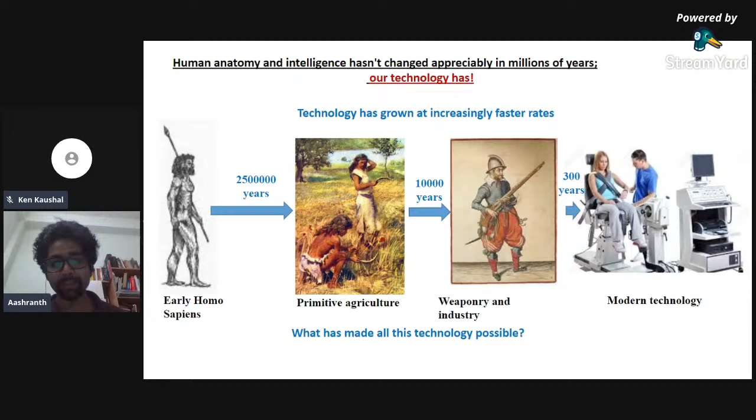The answer, as some of you may have guessed, is to do with materials. Because it's not like our anatomy or our intelligence has really grown greatly in this period. Essentially, the early Homo sapiens had the same amount of intelligence - if you could measure his IQ, it would be the same as ours. So what has changed has really been the way we experienced materials around us and the way we started using them. In the initial Stone Age, we used stone tools. Then as we started using metal tools, we got some ability to handle and shape metals, and agriculture became possible in a mass setting. Then when we found copper and bronze and could start using them, we could extend this a little more. But still, at this point, we were scattered in different bands or tribes in different parts of the world.

It was really the mass production of iron and steel which allowed us to make large groups of human civilization, which have now become countries and so on. So it was because there was so much iron that you could organize an industry, you could build an industry. Most importantly, you could transport material.

So for a long time, it was the case that if oil is found in a certain geography, that's where oil is used. If ice is in a certain place, that's where ice is used. And if minerals are in a certain place, the minerals are only used there, even if they are mined.

So it was to a large extent the discovery and the ways to produce and mass produce iron that led to industrialization. Of course, that led to colonialization. So the countries which developed this technology first went out and started conquering other countries alongside weaponry and industry.

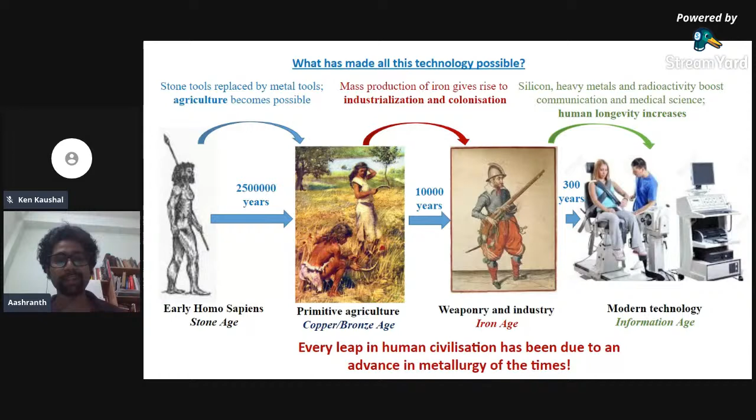Right. So the question is, why should we use metals as tools in the first place? Right. Stone is much more easily found, much more easy to just pick up. It's easy to sharpen. Today you get metallic knives and things very readily in the market.

But if you look at the technology that goes behind it, you need a proper industry. It's not something that generally you can just make at home. You need a smithy, you need a foundry, you need a forge. It takes a lot of things.

And if you see, copper is actually, which you remember the Copper Age and the Bronze Age, copper is actually softer than a lot of stones. And yet, copper tools worked a lot better.

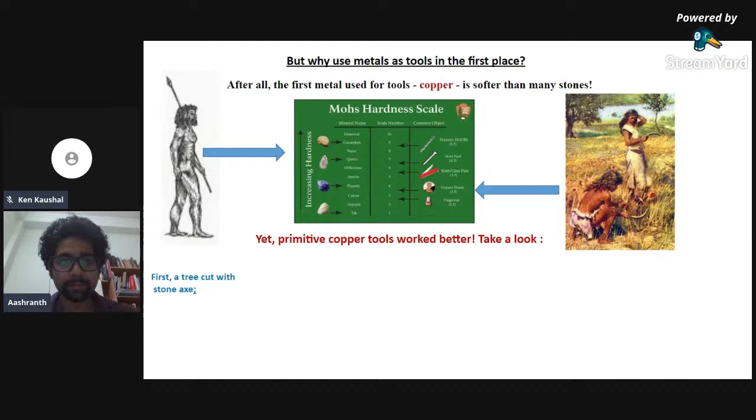You go next, please. Yeah, so this video will probably not play here, but essentially what is being done over here is this person creates a stone axe, and a copper axe, and tries to cut the same thing with them, right? And it cuts much faster with the copper axe than with the stone axe, even though the stone is harder.

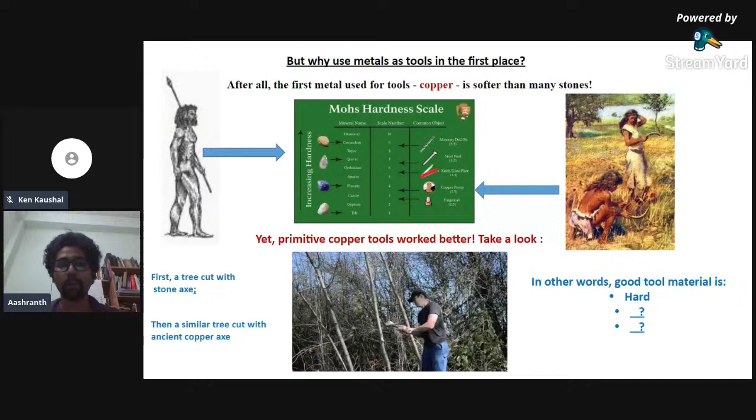So when we think of tools, and essentially an axe is a tool, so what kind of material are we really looking at for a tool? So we know already it has to be hard, because that is what is going to cut through. But there are obviously some other things which is making copper a better tool than stone. So could we go ahead, please?

Yes. So this is a key slide, and I like to think that it has something to do with how we deal with life also, right? So like I said, stones are harder than copper, so they are this thing. But there is something called toughness, okay? So there is something called strength, there is something called resilience. So strength just means how much load you can take. Okay, these three are in normal language, they're used interchangeably.

But toughness is different from resilience, and that is different from strength. So the stone down there is strong because you cannot deform it very easily. The stress ball is resilient because you deform it and then leave it, and it comes back to its original shape. So it is not taking any damage.

Toughness is the cartoon of a boxer being punched down and then coming back. It's the ability to sustain damage, to take damage and be able to move on. And that, just like life, is the key factor for using materials in all our applications.

So it's not that they're the strongest things around. We have stronger materials than metals. It's not even that they don't take any damage, because they do, but they can take damage and still continue working. If you look at it philosophically, that's how you got to be in life. You cannot be the strongest person around. There will always be situations which will overcome you. But what you need to work on is being able to bear that, being able to come back from that.

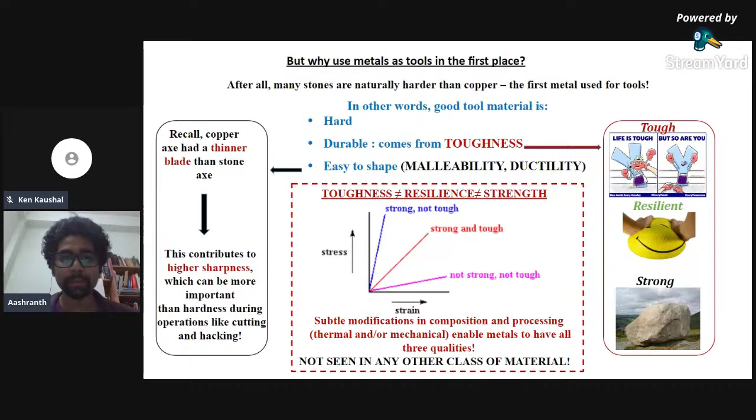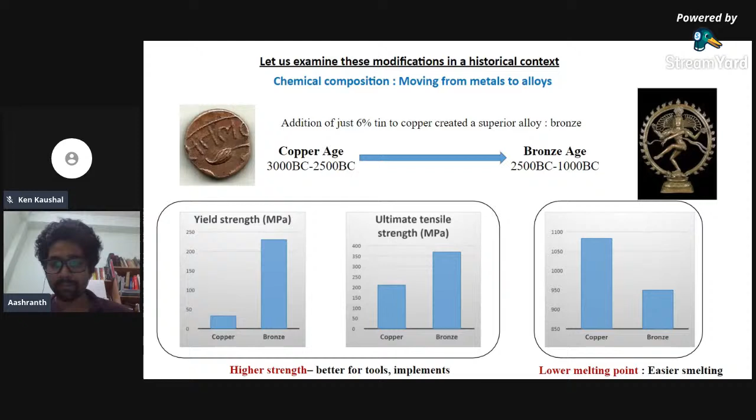Okay, could we go to the next thing, please? All right, so this I will probably go through in a very short time, but I hope it will interest you anyhow. So this has to do with the previous thing.

So when we move from a metal to an alloy, an alloy is essentially a combination of two or more metals. As soon as we mix two of them, in most cases, it creates some kind of defects within the material, and these defects are what make the material strong. This is a very subtle point which is difficult, and I find this in practice because I work on multidisciplinary teams with physicists, mechanical engineers, chemical engineers, who often find it a little hard to grasp that it is defects which give material its unique properties. So a particular kind of defect called a dislocation, that's what makes materials the way they are.

That also makes them easy to deform, and it's by playing with the dislocations that we also make them strong. So in a philosophical sense, it's like the weaknesses or the defects in you that can also be your greatest strength, right? Because perfection is very limited. When something is perfect, there's not much you can do to it. When there are imperfections, you can engineer them, you can tailor them to give you the properties that you like.

And the same thing, this mixing of two metals is exactly why the smelting or melting becomes easier for bronze compared to copper. At this point, we'll just leave it at the fact that dislocations are what help you to deform materials. As soon as you add a new kind of element, a new kind of atom into your material, that atom interacts with dislocations in a different way, in a more aggressive way, and that prevents them from moving. So that's why you get a higher strength.

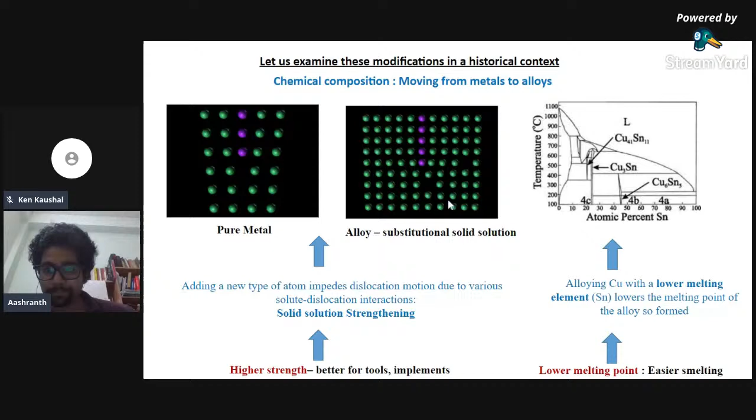Okay, so now we come to iron and carbon, and if you speak to your friends in metallurgy, they will tell you that is all they hear about in 3 years of metallurgy, probably 80% of what they hear, right? And when you think of it, steel is all around us, iron is all around us, and still we keep studying it. This example will probably help you understand why there is so much diversity, so much versatility.

Okay, so just like earlier we spoke about copper and bronze, you added tin to copper to make bronze, and that gave it all those special properties. It lowered the melting point, it made it harder, stronger. A similar thing happens with carbon in steel, carbon in iron. So when you add carbon to iron in certain amounts, it forms steel.

And just so you know, steel is not a single material. There are millions of steels today. Even stainless steel is not a single material, there are millions of stainless steels now. So steel is a broad class of materials which has predominantly iron and carbon. And nowadays we add a lot more things to it.

So it's rigid, it does not bend. Then you have your orthodontic wires, your braces. Those are the same kind of needles.

They bend and they retain their shape, right? So that's how you can use them to wear braces, because they mold themselves according to the shape of your jawline. And thirdly, you have a safety pin.

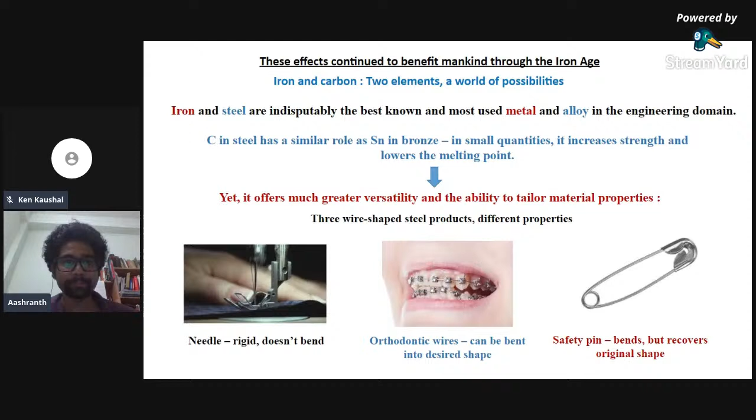Right. So this is a little bit of background into why this happens, and I will not get into it looking at the composition of our audience here. But I will just leave you with this one thought: it's an anomaly, which you could think of as a defect in this system, and that is why iron and steel have this particular property which no other element has.

This particular anomaly, I will just leave you with the fact that it deals with the magnetic structure of the material, the way materials become magnetic above certain temperatures, and below that they have a different kind of magnetism. So it's a very unique thing. There are probably only two elements in the entire periodic table which have this, and no other element has this, and this is what gives it all its unique factors.

Otherwise, you may wonder, why did iron become the most widely used material? It's not that iron is the most commonly found material. Now, sure, we preferentially mine iron and we extract iron.

So, incidentally, any mining engineers in the audience, please leave it in the chat if you are. Right. So we now preferentially make iron, but the reason for favoring it was because it has this inherent versatility. You can make so many different things with it, which is not possible with any other element.

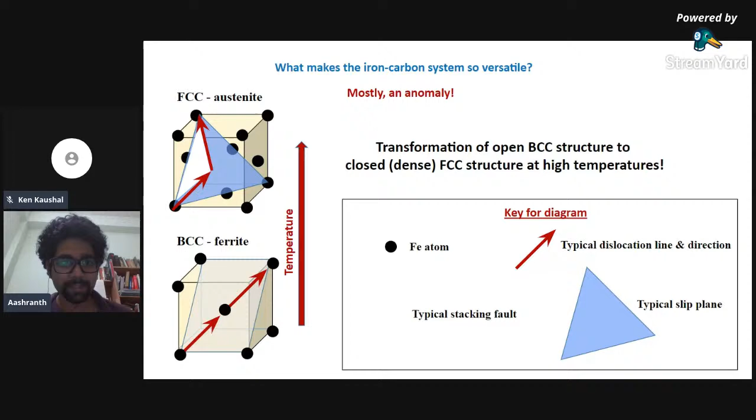We'll just leave it at: there is an anomaly which causes this behavior. But this is the science, or the reason behind it, which we now know quite well, and we exploit it to engineer things. But the fact is that if you look at a lot of historical inventions, the technology has come first and the science has come later.

Iron and steel melt at very, very high temperatures, well above 1,300, 1,200, 1,400 degrees. That is the range in which iron melts and steels melt. So we've somehow figured out ways to do it. And this was the tribe which was producing iron tools, iron implements.

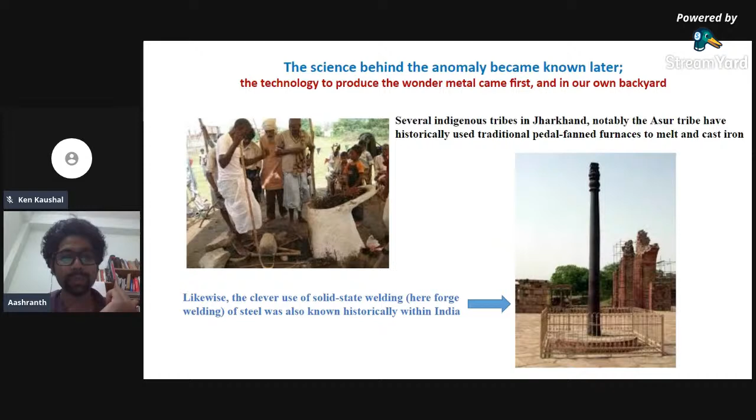So we have had the technology and unique ways to use it from time immemorial. And it's only much later that the science has come into play. The lesson from this is that sometimes while working with these things, you figure out that some particular solution works, and then you go back and find why it works. It doesn't always work the way it does in the textbooks, where you know the theory and reasoning first and then implement it. Sometimes the reverse process also happens.

Okay, yeah, the next slide, please.

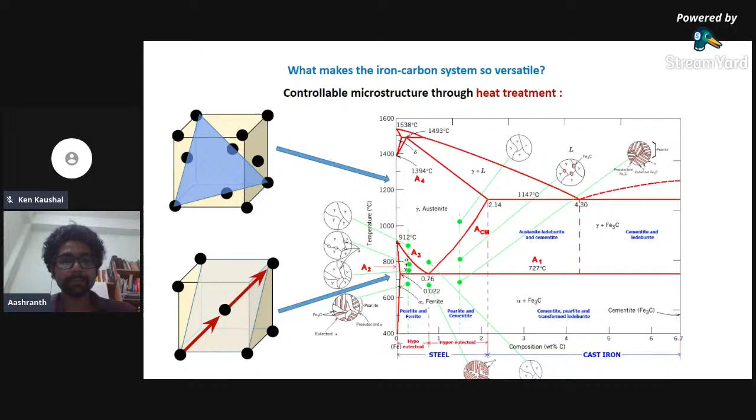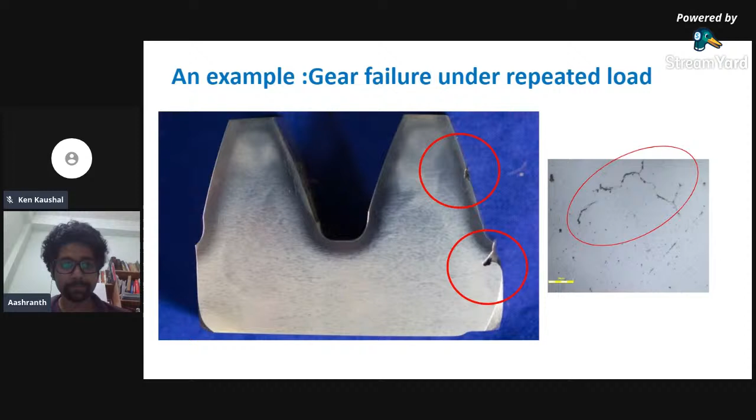So this is again what we call microstructures, the way things are arranged. I told you that steel is an alloy of iron and carbon, and as a rough estimate, the more carbon a material has, the stronger it is. The way this carbon is arranged in the material can differ greatly depending on the heat treatment.

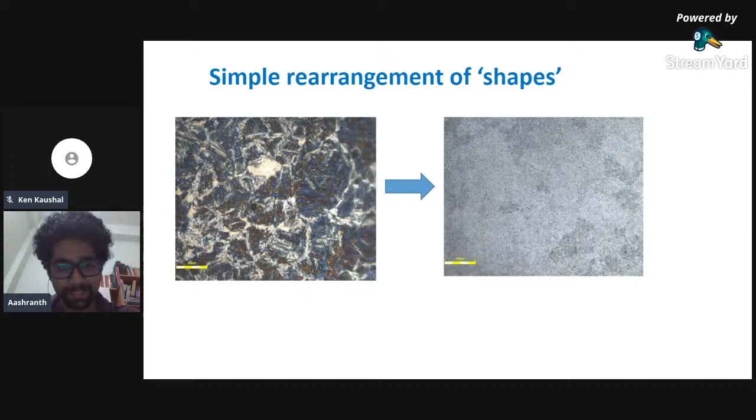And this is responsible for so many industrial shutdowns, so much costly maintenance, so much downtime. So you hear a plant is down for 4 months, 2 months - often the reason is just something as tiny as this. It's tiny, but it's very difficult to take care of. Could we go to the next slide, please?

Initially, when smartphones were still new, you do this, and then you lose your smartphone, and you want to go back to your old Nokia 1100. But of course, mobile phone manufacturers are much smarter. So they said, okay, we will provide you with a screen protector, a screen guard, we'll provide you with Gorilla Glass. So you put a screen protector on it, and when your phone falls down, it's that which either doesn't break - so that's a very good glass, corning glass, toughened glass, tempered glass, so many different names for it - or it breaks and then it's sacrificial, so you can remove it. And that basically follows the exact same principle as carbon and iron.

So the way you rearrange them, in case of these Gorilla Glasses, these are ions, aluminosilicate ions, which change the properties of the glass in exactly the same way that tin changes copper to make bronze, and carbon changes iron to make steel. These ions over here make your normal glass into a Gorilla Glass, which is so tough.

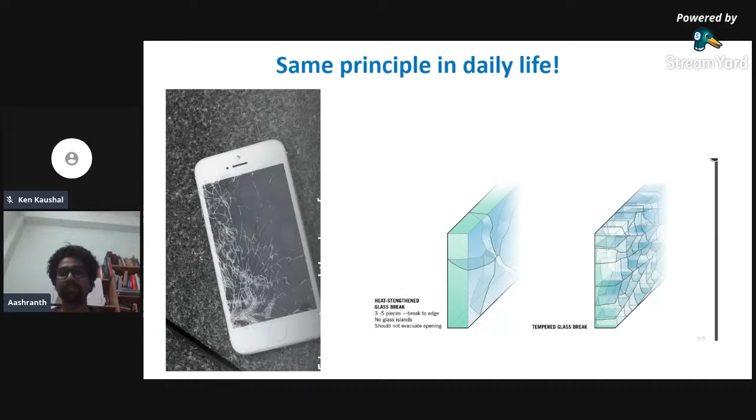Right, and this is where we come to a little bit of non-metallurgy, and this is for the other core branches, especially the mechanical and chemical engineers. Since I don't see any mining engineers here, we'll focus on this. So how do we make this rearrangement? We just said it's a simple rearrangement of shapes, and we said vaguely that it's something to do with heating.

So what is done in such cases is it is heated to a very high temperature, and then it is cooled at different rates. Either it is cooled very fast by plunging it into water or oil, or it is treated by just leaving it in air, or you bury it under sand and keep it for a long time, in which it takes a few days to cool. All those give you different properties.

But here we're going to talk about the fast cooling method that is called quenching. And this is, again, a word used in common English. In movies, when you see blacksmiths making swords, they heat it and then they hammer it - that's essentially forging. And then they plunge it into water or oil or some liquid, which is what cools it.

And then they again do some treatment, which is called tempering. This process, which has again been known from time immemorial, involves heating a metal, especially one made of iron, like steel, and then putting it in water. It becomes very, very hard. This process is called quenching, and only now do we understand it.

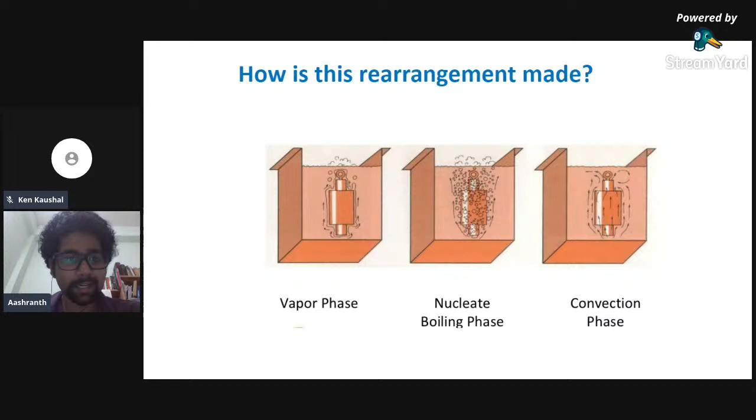So let's go to the next thing. Yes, this is the practical application.

So small changes, like I was telling you earlier, differences of a few seconds or a few degrees Celsius, can make so much difference and can be very difficult to practically implement. To do that well, you need to cooperate very well. You need to work like the fingers of your hand. You cannot have your thumb moving separately from your index finger. You have to work together, and you have to respect the experience of people who've done this thing.

You may often come across situations where, being an engineer from a prestigious college, you are put in charge of people much older than you, and you've got to manage them, especially in the core engineering branches. You may often feel that they don't understand what they do, but what they know through experience, even if they don't understand the science of it, is a lot more than what you will learn until you spend enough time in your industry.

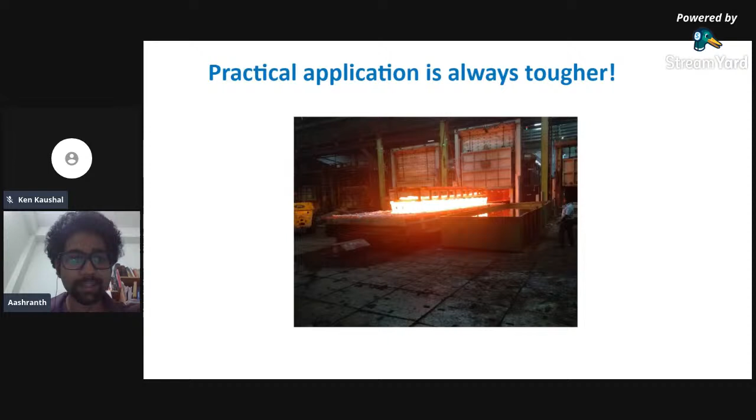So that is a bit of learning from these things. Yes, let's go next, please.

Okay, we'll just quickly move through this. This is an interesting story of nickel. Nickel has had a very amusing story, it was born out of a mix-up. Metals come from ores, and when you look at a metal they are quite easily identifiable. Iron is a gray metal, and when you leave it in air it becomes brown because of rust, brownish reddish. Copper is a brownish red metal, and gold is yellow.

So when you see them that way, they're fairly easy to identify, and the civil engineers, I saw there were a few, this is how you also identify a lot of ores. This is how a lot of geology happens, because there are certain appearances of it. But when it is in the ore form, it is bound with other elements, and it does not always show these metallic or elemental properties easily. So it so happens that the ore of nickel seemed like the ore of copper.

So they mined it, extracted it, and then started processing it, and they found that this is not copper, because copper was very much in demand at that time for utensils, for electricity lines, and so on. This is now we've come almost to the modern era when electricity is happening. So they failed to smelt copper, to extract copper from it.

So they called it rascal's copper or devil's copper, because a lot of these developments have happened in deeply religious countries. So anything that is not favorable to you is devilish or the work of the devil and so on. In a lot of the Scandinavian countries, the far north, cold European countries, 'Nick' is the name for a devilish spirit or a sprite. So they called it Kupfernickel.

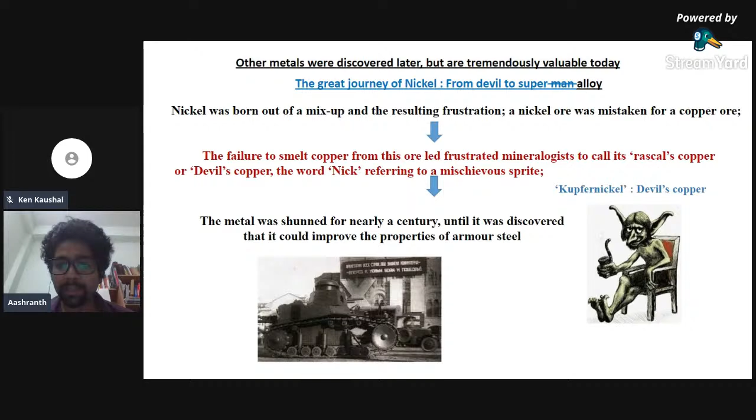So I think historically there has been a strong influence of war, whether we look at modern history or ancient history, and we can only conjecture. But my feeling is that probably we would not have seen this much materials research—probably we would still be living with copper and bronze. Okay, so we will come back to this. Okay, can we go on to the next slide, please?

So now nickel is no longer just an alloying addition for steel like in armor. Now it has its own class of alloys.

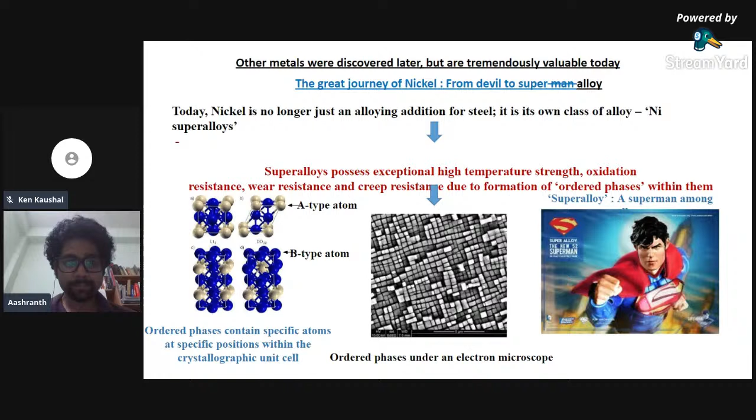Fine, fantastic. So we finished the metals and materials part, and now we come to higher education opportunities, but really we will talk about job situations and so on.

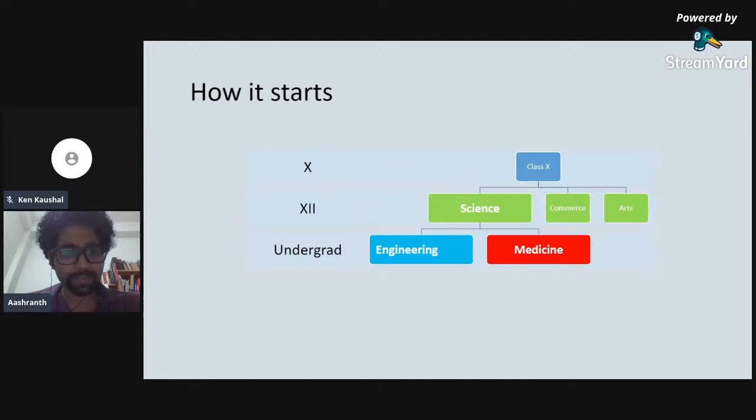So you're pushed into that. Then you finish your 12th, and basically you are asked to write the engineering entrance exams or the medical entrance exams, not much else. So from an early stage, this channeling into certain fields that are supposed to be lucrative or good for your future happens. And you're not to blame if you fall into that, because that's all that you've seen at that point. So you go along with that, and then that continues.

And this is how it happens. I would really like to know if this has changed now, so please drop comments if you feel this does not apply to you, or you have some other ways. I'd really like to know what the current generation of engineers thinks now. But this is from my personal experience: you're in branch X, whatever that is, and you essentially have three options in front of you. Generally some people try to put their feet in all three also.

Either you want to do higher studies in that branch, or you take up a job whether or not it's related to that branch, or you go for an MBA and hope for better job opportunities afterwards. Please do tell me if now some other option has come up, or there's something else people are doing. Maybe startups are one thing, right? A lot of people probably want to start their own company, which is probably a better thing than these.

And now if you want to do higher studies, then either you write your GRE or TOEFL and these exams for countries abroad, or you write GATE. And again, in my batchmates, there was a big divide between these people. Those who were writing GATE generally were not writing GRE and stuff, and those who were writing that were sure they don't want to write this. So this is how things start.

You get channelized, you get funneled into something because maybe your seniors have done it and that's what you hear, which is natural because you interact most with your seniors. You feel if everybody's doing it, you should also do it. But the first blunt thing I would like to tell you is that if your reason for doing something is that most people are doing it, that is probably the wrong reason to do it.

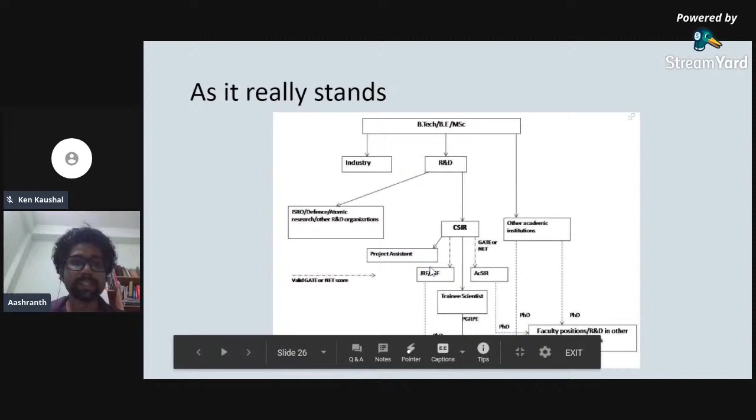I've always been surprised as to why more people from our college don't write GATE. You can tell me in the comments if that has changed, but if I were to estimate, in my batch there were probably just 15-20% of us who wrote GATE. And from my score, I know the kind of effort I put into it—I can tell you that 80% of my performance was just by sitting in class. So you don't really need to do much more if you're already in this college.